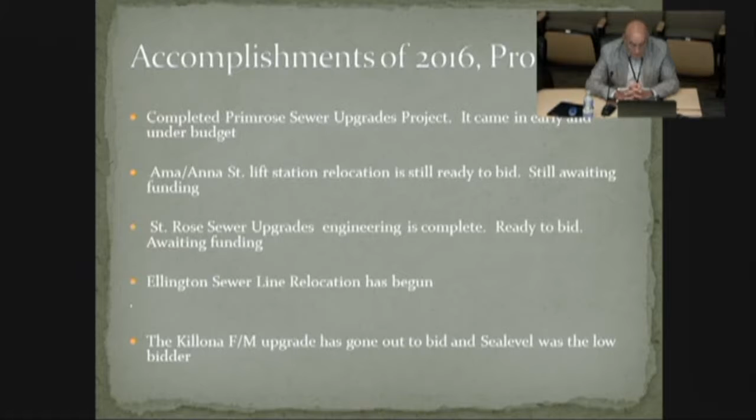Accomplishments on maintenance and miscellaneous: we located and repaired major sources of I&I in the parish. This is an ongoing issue here.

We upgraded electrical controls at some lift stations. We pulled, inspected, and brought all lift station pumps to factory specs, which again is on a continuous basis.

We added odor control units to two lift stations - one in Muntz and one at the Primrose lift station - and we have some small units at other locations throughout the parish.

Our CMOM program is rehabbing damaged line, both point repairs and lining. That goes hand in hand with repairing the major sources of I&I. I&I is really a problem for the parish, given how old our systems are.

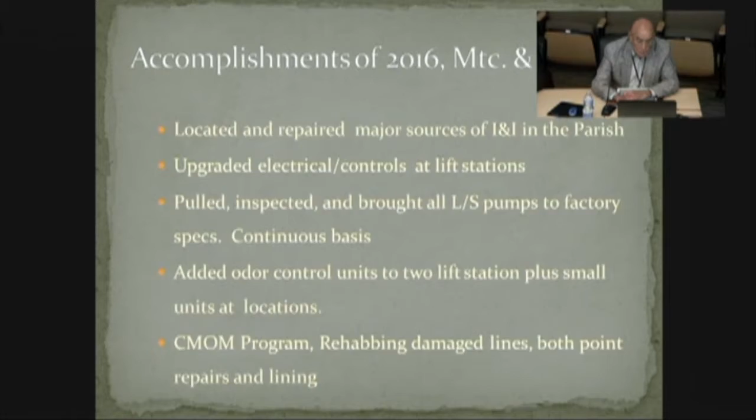We upgraded some PLCs at the Hahnville plant and the Destrehan plant, and added some additional telemetry for the SCADA system. Primrose is on SCADA.

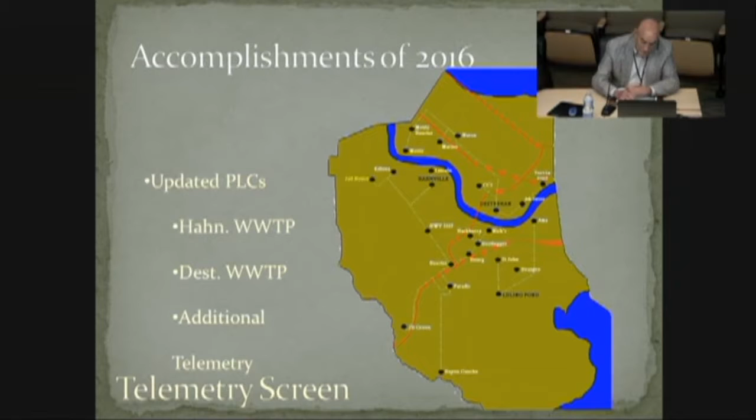I'm in the process right now of upgrading one of our lift stations on Lakewood South. It's a problem lift station, and I've got some pumps ordered there. We are going to add SCADA to that, so when we do have a problem, we can address it right quick.

Plant status: the Destrehan wastewater treatment plant is operating per design. This plant is going on 17 years old. Last year we treated 1.246 billion gallons of sewer, which is down about 0.101 billion gallons from 2015.

I added this in this year because it relates to rain and goes hand in hand with the I&I. If we took our average dry flows, what we treated would have been 0.949 billion gallons. That's a delta of 0.297 billion gallons, or 24% of what we treated is I&I - infiltration and inflow.

We hauled 1,476.48 tons of sludge to the landfill, which is down 148.67 tons from 2015.

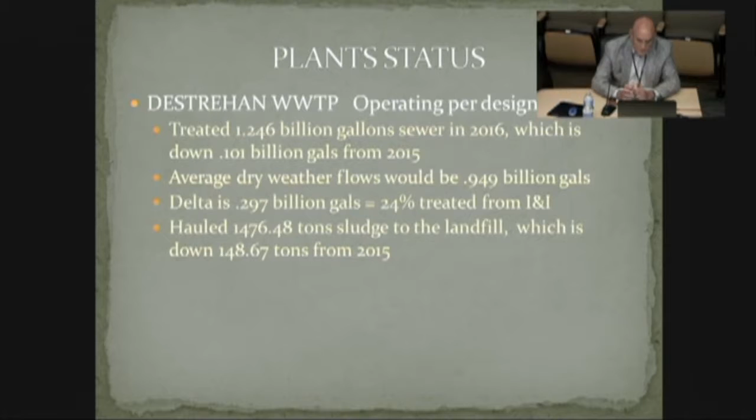I left these pictures in here - this is our Destrehan plant. This plant looks the same; it looks better in some respects than when he first took this plant over 17 years ago. But it comes at a cost.

The Hahnville wastewater treatment plant is operating per design also. We treated 0.857 billion gallons of sewer, which is up 0.022 billion from the 0.835 billion gallons last year.

This plant's average dry weather flow with no rain would be 0.547 billion gallons. The delta of that is 0.310 billion gallons, which is 36% of what we treat there is I&I. As you can see, these numbers are adding up.

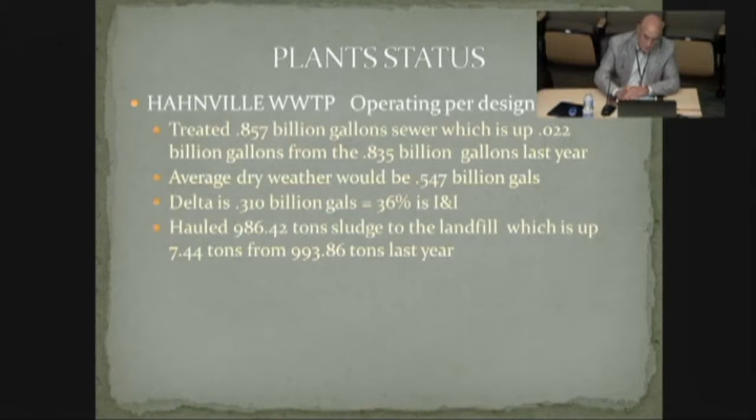Out of Hahnville, we hauled 986.42 tons of sludge to the landfill, up 7.44 tons from the 993.86 tons the previous year. And these are some pictures of the Hahnville treatment facility.

The Luling oxidation pond, I put on here operating per design, but we're struggling with this one. We need some major upgrades to the Luling oxidation pond, and those are being planned.

We treated 0.627 billion gallons of sewer, which is down 0.012 billion gallons from the 0.639 billion last year. The average dry weather flows would be 0.365 billion gallons. The delta there is 0.262, which represents 42% of what we treat at the pond as a result of I&I that go into that system.

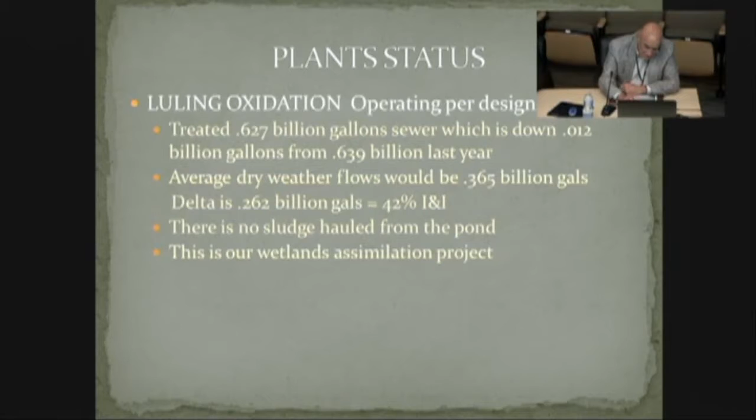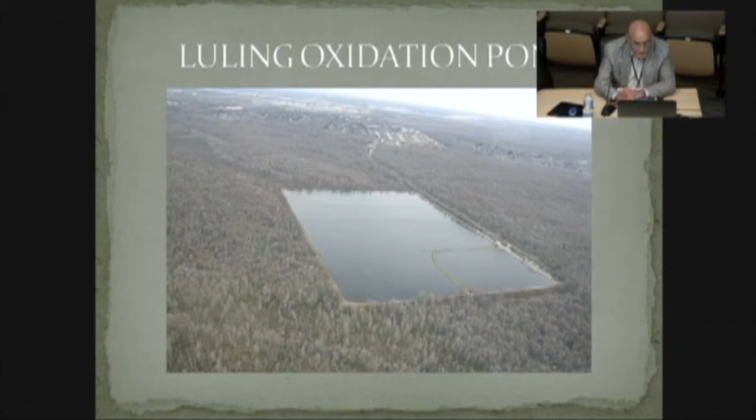There's no sludge haul from the pond, from our oxidation pond, and this is our wetland assimilation program. These are some pictures of the pond. We have to do some dredging of that little cell in the lower left-hand corner there, and that's being planned right now, what we're going to do there.

The totals for the year, the total sewage that we treated was 2.730 billion gallons. That's down 0.092 billion gallons from last year. This is where it gets interesting. The average dry weather flows should be about 1.861 billion gallons. The delta there is 0.869 billion gallons. 32% of what we treat throughout the parish can be contributed to I&I.

And I went one step further on this one. The cost for the additional treatment, which is I&I, is 1,016,000 dollars. And that's based on an actual cost of $1.17 per 1,000 gallons treated.

The total sludge hauled was 2,514 tons, down 105 tons from last year. The total maintenance cost, just maintenance now, is $995,605, which is up approximately $14,000. That's $14,000 more than last year. Last year it was $60,000 more than the previous year.

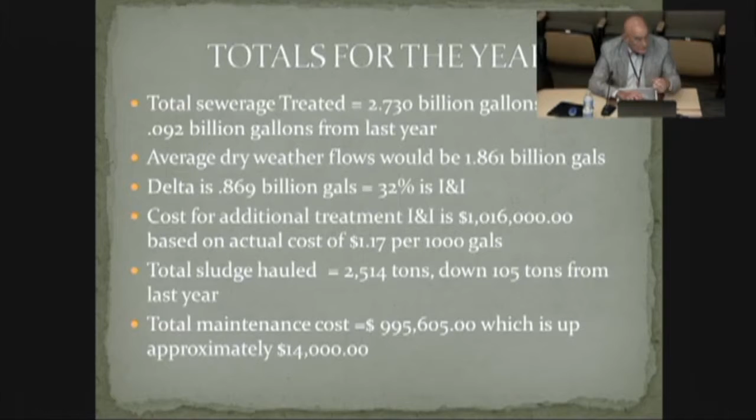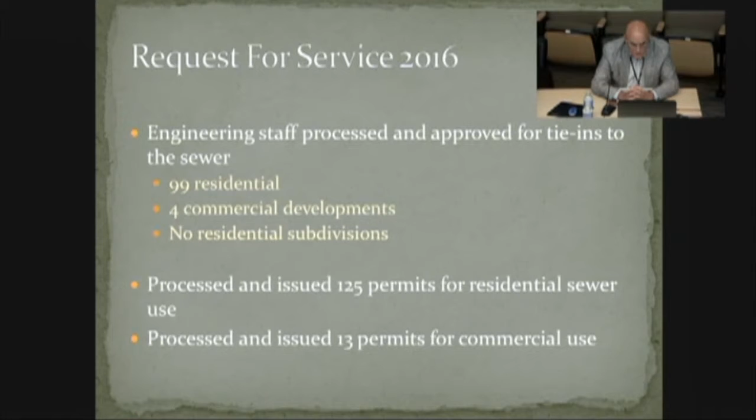Request for service in 2016, the engineering staff processed and approved for tie-ins to the sewer 99 residentials, 4 commercial developments. We had no residential subdivisions last year. Now, we will have some this year, and some of them started last year, but none of them were done last year. We processed and issued 125 permits for residential sewer use. Out of that 125, only 99 actually tied in. And we processed and issued 13 permits for commercial use this past year.

Goals for 2017: complete the St. Rose sewer system upgrade, which is critical. That'll take care of quite a bit of I&I. Complete the Anna Street lift station upgrade. Complete the Killona Force Main, that's from Highway 3127 to the Hahnville plant.

We need to upgrade the Hahnville wastewater UV disinfection system. It's too small to handle the flows that go through the system right now. Our permit allows us to bypass it, but we have to do something about that. Upgrades to the Luling oxidation pond, that's critical, and we're working on that, pushing real hard to get that started.

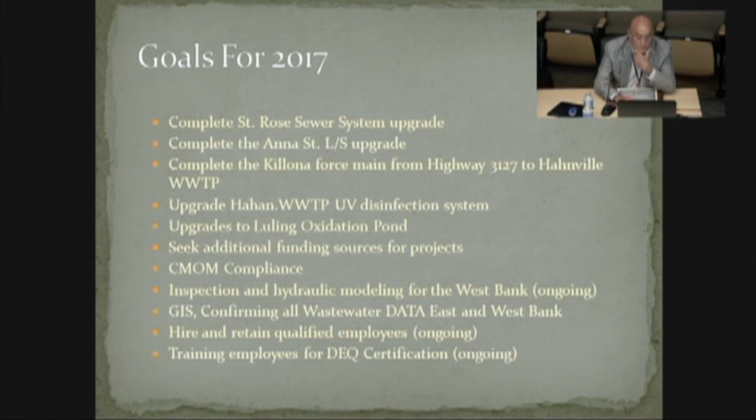One of our goals is to seek additional funding sources for projects. Continue with our CMOM compliance. Our inspection hydraulic modeling for the West Bank, that's ongoing. Our GIS, confirming all wastewater data, East and West Bank. Ongoing is hire and retain qualified employees and training employees for DEQ certification. That's ongoing, and that's pretty tough because of what they have to go through. And that pretty much sums up my report.